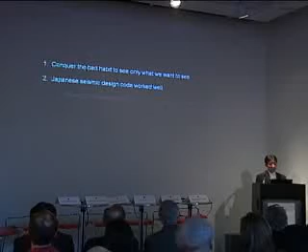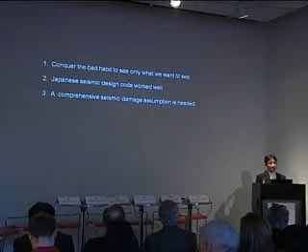Anyway, the Japanese seismic design code worked very well for this event. A comprehensive seismic damage assumption is needed, including secondary elements, furniture, and equipment, and all the elements in the building, because they react to each other and can be harmful for the people.

And this is another issue, though. The eco building can become a disaster-resistant building after the power consumption restriction.

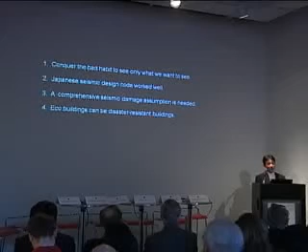For future reference, I'll introduce the reasons for the slow recovery: widespread low-density areas to recover, relying mainly on vehicular transportation, an enormous amount of wrecks and rubble in small places, and ground loss of 200 square kilometers.

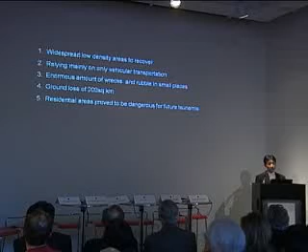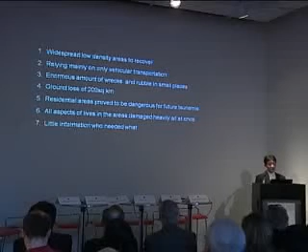The residential areas proved to be dangerous for future tsunamis. All aspects of life in the areas were damaged heavily, all at once. There was little information on who needed what, and not enough stock of materials because of the just-in-time system, which is the Toyota system.

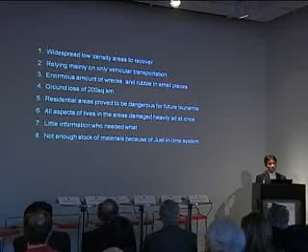But we need to learn, and after learning from this situation, thanks to your kind support, we will surely be able to recover our site, our district. Thank you very much.

When I received an email about Sendai from Ms. Shoboji-san and AIA, I was so pleased to know many people in the United States also love and worried about Sendai, my special work. After the earthquake, because of partial interior damage, Sendai Mediatheque was closed for a while, and on May 3rd, except for the 7th floor, the use of Sendai was resumed.

The 2011 Tohoku earthquake, officially named the Great East Japan Earthquake, was a magnitude 9.0 undersea mega-thrust earthquake off the coast of Japan. It was the most powerful known earthquake to have hit Japan and one of the 5 most powerful earthquakes in the world overall since modern record keeping began in 1900.

The nearest major city to the quake was Sendai in Miyagi Prefecture on the main island of Honshu, 81 miles away, and the quake occurred 232 miles from Tokyo. The strong ground motion registered a maximum of 7 on the Japanese seismic intensity scale, the JMA scale, in Kurihara, Miyagi Prefecture.

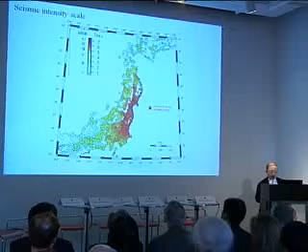This prefecture recorded 6 on the JMA scale, and recorded 5 even in Tokyo.

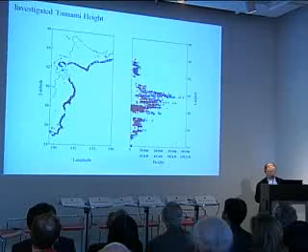The earthquake resulted in a major tsunami, which brought destruction along the Pacific coastline of Japan's northern island and resulted in the loss of thousands of lives. Investigated tsunami height reached up to 128 feet, and in some cases traveled up to 6 miles inland.

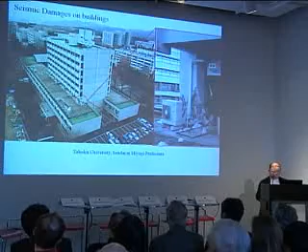These images are an excerpt from a Japanese architecture magazine, showing a building of Tohoku University in Sendai. The columns are broken by the pressure caused by the overturning moment of the shear wall. This is a major example of a building that was structurally and extensively affected by the earthquake.

Fortunately, while there were some damages to interior materials, no structural damage occurred in Sendai Mediatheque. The structural system and earthquake-resisting system of Sendai is briefly discussed below.

In order to make structural members as transparent and delicate as possible, the so-called tubes were each given a dispersed three-dimensional structure with relatively thin steel frame members. The tubes are 13 separate shafts of different sizes, with diameters ranging from 2 to 9 meters.

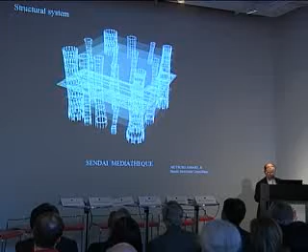The 4 main tubes with large diameter work seismically as upright cantilevers. These compose a ductile-type rigid frame structure on the basement floor and a rigid single-layer lattice structure above ground. This assures a main structure that is structurally high in strength and rigidity, while architecturally transparent, strong, and supple.

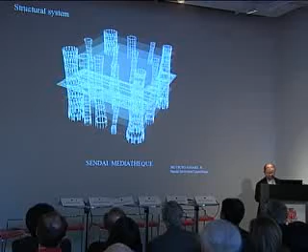These 4 main tubes are distributed in a balanced way on each floor so as to avoid generating torsion as a result of eccentricity. The other 9 small-diameter tubes contribute practically nothing to the resistance of horizontal forces and are suitably arranged in plan as support for vertical loads.

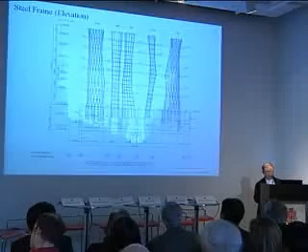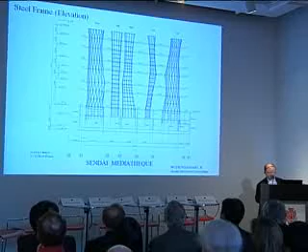I was asked to make the plates as light as possible for a span of approximately 20 meters. I therefore used the most sectionally efficient system, a steel plate sandwich structure with a depth of 40 centimeters. Lightweight concrete of 7 centimeters depth was cast on top and integrated with the rest of the structure by means of shear connectors.

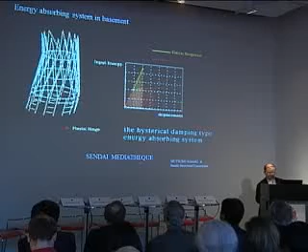One of the outstanding features in seismic resistance design was adoption of a damage control type of design. A hysteresis damping mechanism for absorbing energy was introduced in the main structure on the basement floor.

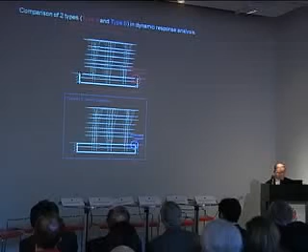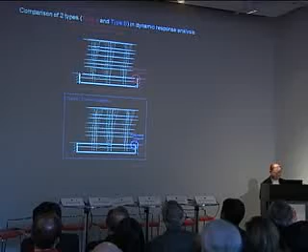The floor framing of the first floor was structurally separated from the external wall of the basement by providing support only in the vertical direction, and by providing looser support in the horizontal direction. This had the effect of making the basement floor the level at which seismic energy is introduced into the steel frame shaft of the main structure.

The rigid lattice structure above ground was switched to a ductile type rigid frame structure in the basement floor. The ductile type rigid frame is a type of structure which is in marked contrast to the lattice structure from the standpoint of seismic performance.

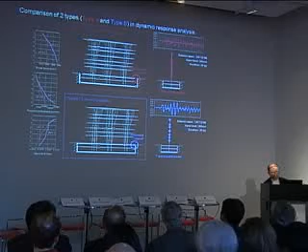The idea was to absorb the input seismic energy during a major earthquake at the initial level of the framework, at the basement floor, and to reduce the input of energy into the upper structure after the basement floor has yielded.

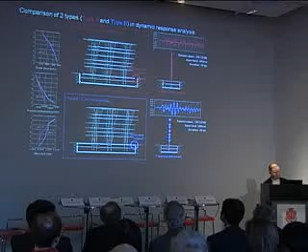The initial level, the first basement floor, is a three-dimensional rigid frame structure with a circular plan. Among the devices that endow this level with suitable rigidity and strength and clarify its collapse mechanism of weak beams, the most distinctive are the penetrating beams, which have been designed to yield first at the midpoint and incorporated in a ladder-like configuration, and the cast steel pins used at the base of the column.

Concentrating much of the energy of plastic strain in the basement floor in this way keeps the upper structure in the elastic state, preventing residual deformation even in a major earthquake, and also makes it possible to estimate the location and extent of damage on the basement floor.

The result is a clear, supple design that takes full advantage of the capacity of steel members for elastoplastic deformation. This damage control system makes restoration possible even if a major earthquake of the once-in-a-millennium category strikes and a certain amount of residual deformation results, at the intended level of damage concentration, namely the basement floor.

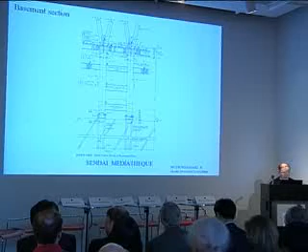Because they have been detailed to freely rotate, the column bases can be restored to their original position by using an oil pressure jack against the basement wall. The penetrating beams, which have been deliberately designed to absorb damage, can be removed and replaced.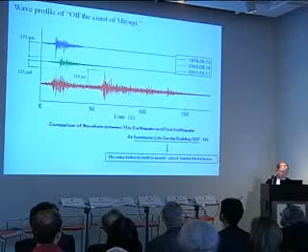Through eigenvalue analysis of the building, the natural period of Sendai Mediatheque is about 1.4 seconds. If type B, a conventional type, had been adopted, the natural period would have been 1.0 seconds. The difference of natural period has a relationship with input seismic load.

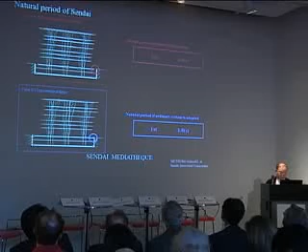This means the Sendai Mediatheque is subjected to relatively small seismic load from earthquakes which occur off the coast of Miyagi. Historical records show us that such earthquakes occur every 30 or 40 years. This fact is very important for the seismic design of Sendai Mediatheque.

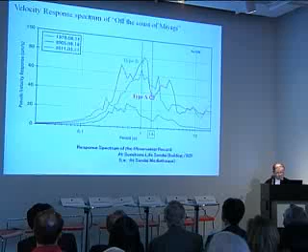If I had adopted a conventional system for the first floor, I mean type B, the natural period of the building would have been approximately 1.0 seconds. This means...